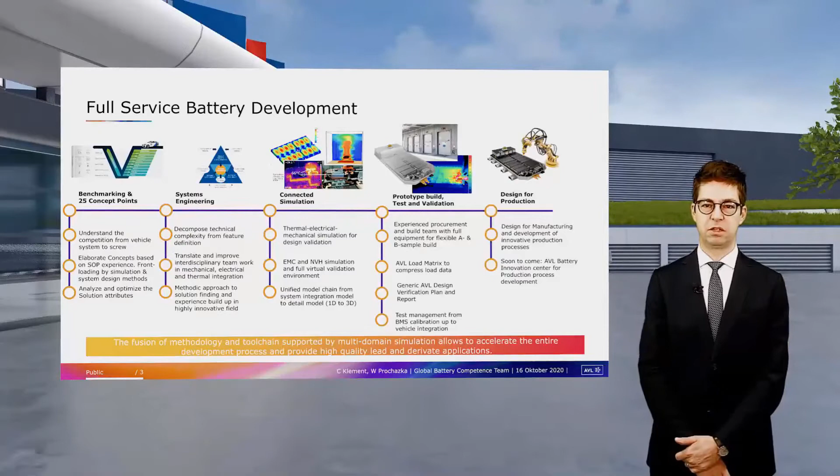So we have completely automated machinery, as you can see in the rendering still, but it's now in operation since April this year. Module stacking, laser welding, gluing, sealing, everything like that on fully automated 6-axis robot stations.

This means we're actually covering the battery development and the battery life cycle that you have as an OEM, from the inception of the technology that goes into the series development later on, over the development, the safety, the performance, the cost, the production, up to topics that are in field like serviceability and then recycling and design for recycling. And very clearly the CO2 life cycle is a topic for us too.

But today we want to look at the benchmarking, and we want to look at batteries that we have seen in the last iteration of this talk already, like the Porsche Taycan, NIO ES8 and then Tesla Model 3, with a new contender this time, a fourth contender — up to now I only had three, this time I actually have four — the BYD Han.

Very interesting pack because it is LFP, the others are NMC packs. It is a cell-to-pack approach. It is approximately the same size as the Tesla Model 3 pack in terms of usable energy capacity. But you can see it has a higher voltage than the NIO and the Tesla, with about 570 volt nominal, which is more closely aligned from the electrical design standpoint to the Porsche. That's why I left it in here for some electrical safety comparison. And very impressively, it has more than 80% pack-to-cell weight ratio — 83 point something. This is why we're today comparing this pack to the others.

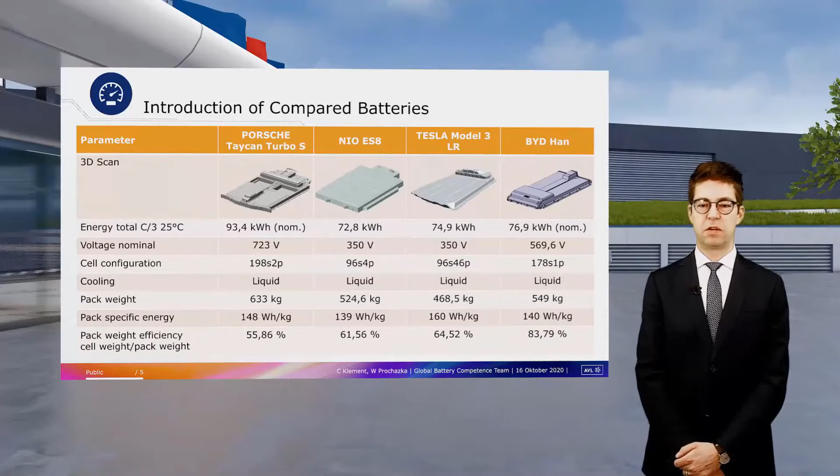Especially I want to take out of the benchmarking process — you can see there is a lot of work packages from the vehicle all the way down to the cell tear down — I want to take out the topic of safety. This safety is on one hand the integration safety, on the other hand it is also cell safety, electrical safety. We're going to compare the packs on a couple of those measures.

So first of all, I want to go on the vehicle side. Today with the recording I don't have the videos like in the last iterations, but I have pictures here, and it should give you the impression that on the Porsche Taycan and the NIO, the vehicle is stiff. The battery is stiff, but it's still more of a take-the-force-and-absorb-the-force on the side sill measure. The Tesla Model 3 actually is a very stiff vehicle.

So actually the side crash has the need for a side curtain for your heads and so on in airbags. It is a very stiff vehicle — it really bounces back from the pole. You can see that in the video here, not so much. The BYD Han is a very conventional vehicle in that regard. It is a quite soft vehicle.

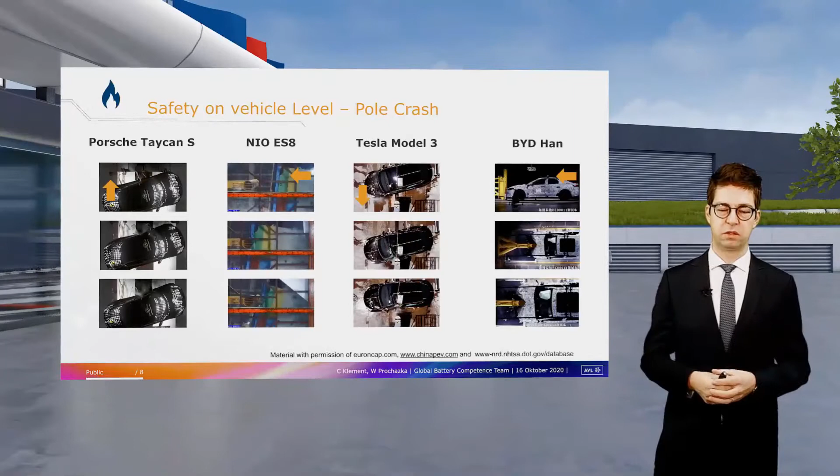It absorbs a lot of force, and it has a battery integration that is, by comparison of the screw lines, actually interesting. On the side, beside the screw integration, there's this red line, which is actually the cooling channels for the cooling pipe work for the rear e-motor, before it goes into the side sill area. So even if the battery is mounted, there is an exposed cooling pipe work here, and on the other side there's an exposed line as well.

So a little bit different integration. The other three vehicles, you can see the integration of the pipe work, if there is any - on the Tesla you can see it stick out - is on the top of the battery side. So there's a side sill, the battery, and the pipe work is on top, protected from the underfloor of the battery. A little bit different integration here than on the other three.

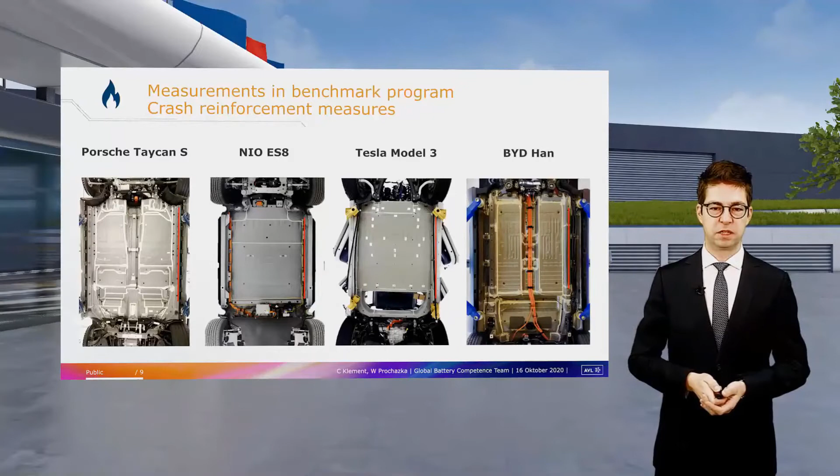In terms of distances to the side sill, the pure distance from side sill to battery pack is rather on the conservative side. NIO and Han are around 165, 170 millimeters, versus Taycan and Model 3 which are around 120 to 140. On the other hand, it seems like there is not so much on the side of the battery, as the side sill to cell distance is actually below 300. So here it's not the most conservative, it's somewhere in the middle.

But as with the two others that have a rather distanced side sill to cell distance, it is a prismatic cell, and it has the tabs on the sill side. So it doesn't have tabs on the top side like the Tesla Model 3 has. When you crush it, the high voltage bus bars are not in danger of getting short-circuited.

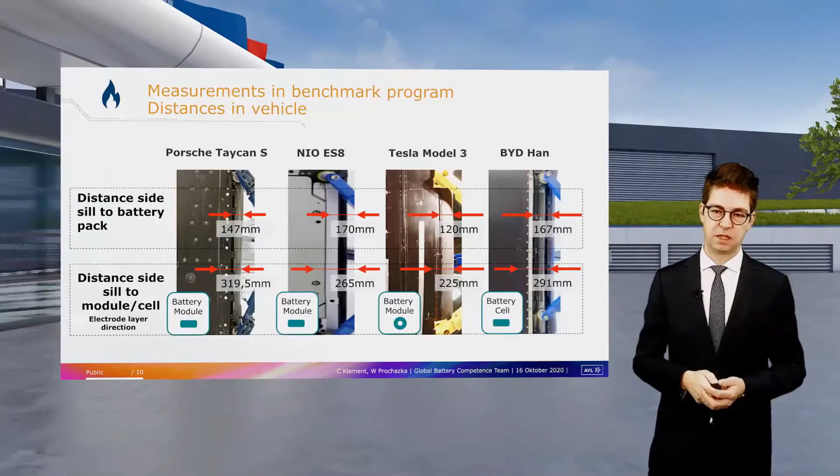So to look at the side integration in the battery pack, battery positioning - we can see the Han has a slight side sill here that is used for mounting. It's an extruded part, and then it goes directly into the tray. The tray is 16 millimeters, so medium size thick, and only on the rear side does it have this extrusion profile for the second floor. So this is only under the rear seats - the second floor you can see here. The front seats and under the main area, it's only one floor.

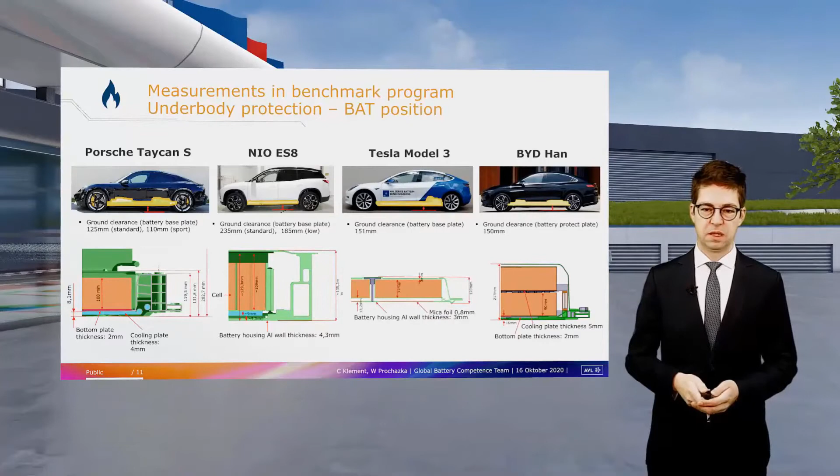And the cooling system is actually on top of the cells, not like with the other packs where the cooling system is between or underneath the cells. Here the cooling system is on top of the lower layer of cells. And the bottom protection plate is 2 to 3 millimeters, like in most vehicles. So here, quite state of the art.

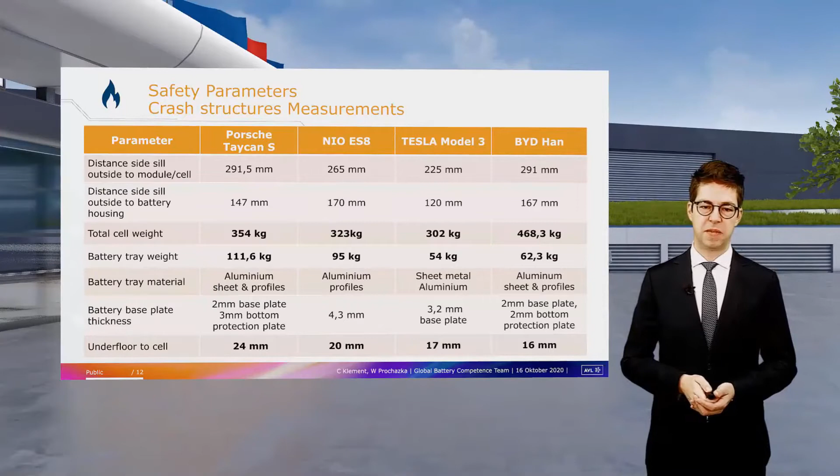What does that then give in terms of cell weight to battery or tray weight? That's quite interesting - actually it's the lowest number we have seen so far. So here, the cell-to-pack approach really comes into full play.

We see only 13% of the cell weight is actually in tray weight. That's even undercutting the Tesla with about 18%, even though it has the same base plate thickness, even a little bit more in terms of 4 millimeters compared to 3.2 millimeters, and it has the same underfloor to cell ratio as the Tesla Model 3.

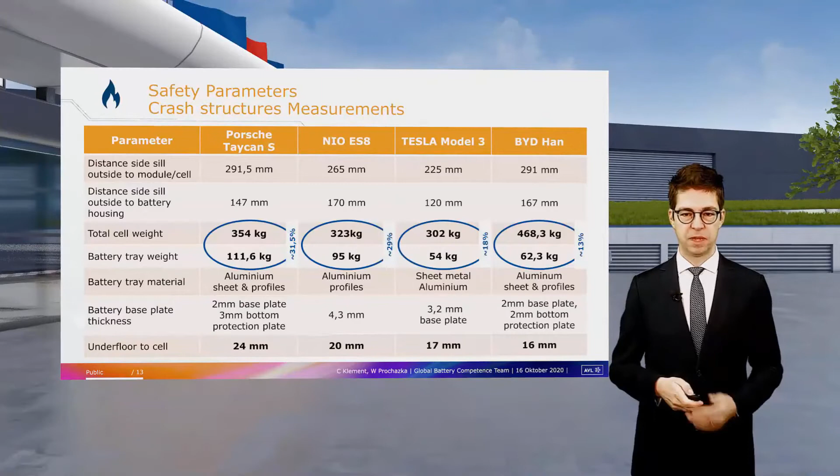So here, definitely the cell-to-pack approach plays out, and we can look at the cell to see if it can actually take all those forces that might go in its direction due to crash and so on. We put the cells into crush - you can see on the right side this very long cell. Actually, this is more than a meter of cell with more than a kilowatt-hour of content. So it was quite interesting to actually do all the abuse tests on it.

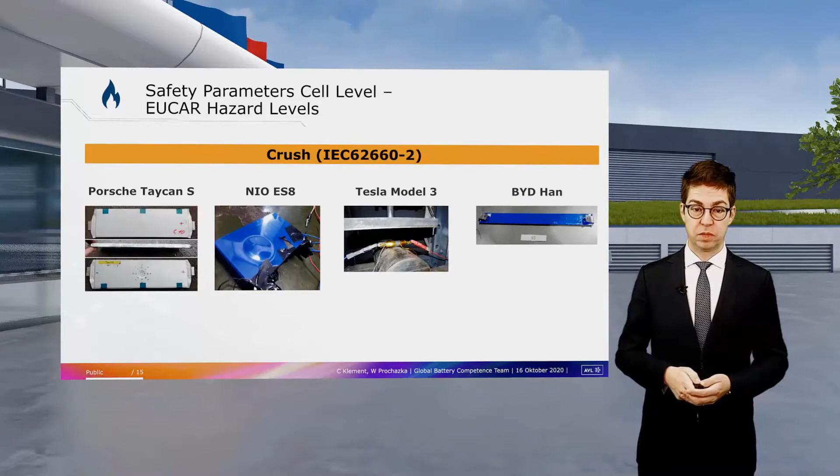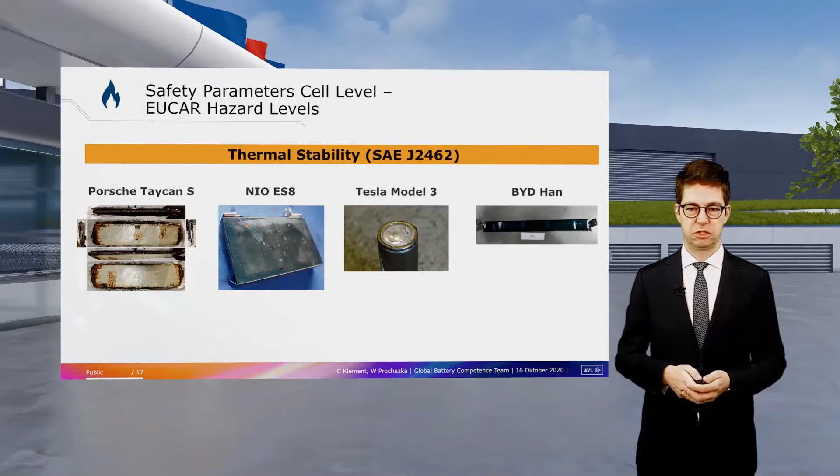But it survived quite well, so no issues on the crush, not really issues on nail penetration. For thermal stability, we had a reaction, so you can see the cell is quite dark, and also the cell is bubbled up - actually similar to the reaction the NIO ES8 showed in terms of strength. For electrical short circuit, all the cells survived quite well.

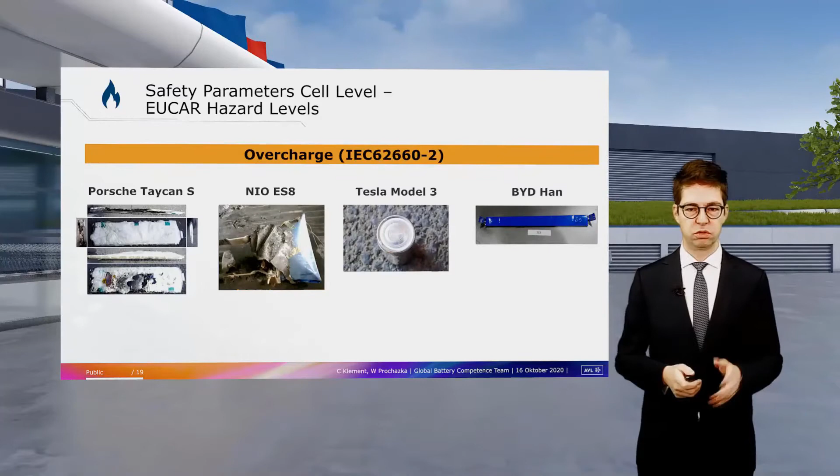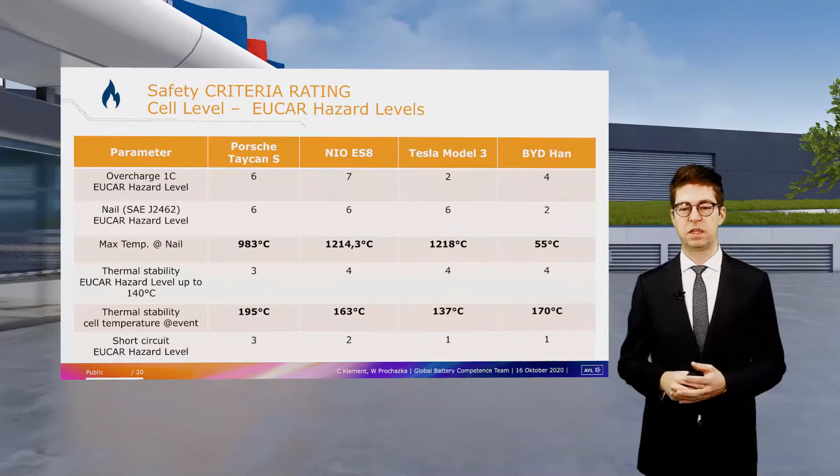Then the overcharge test, here also cells survived quite well, a little bit bubbled. So in total we can say that the Han cell actually has no safety level beyond 4 as of current testing,

which is better than the NMC cells, especially for nail and overcharge. On the other hand, for the nail penetration testing, the maximum temperature that LFP shows is definitely not even close to what the NMC cells are providing, even though the Han cell itself is quite large, and there is a significant amount of electrochemistry being shorted by the nail. So here we can see that the LFP cell is quite safe.

On the other hand, as I said, thermal stability, we're approaching nearly the same temperatures as with the NMC or NCA cells, a little bit less good than the Taycan cell. So the Taycan cell still remains the cell with the highest thermal stability.

Our conclusion here is that thermal stability is not so much a cathode material issue as it is an electrolyte and separator issue. We had some talks with a couple of suppliers since the last presentation I gave on this separator issue, and just seeing what kind of complex structures are in there, you can really say there is a lot of potential in the separator and electrolyte mixtures to get the thermal stability right. But it is also a cost issue that you have to offset somewhere on your pack level in the end.

For short circuit, we do have a hazard level of 1, so nothing really happens. In this case, the protection is quite okay. Tesla Model 3 has the same very low reaction, but it actually has an in-cell measure to compensate for that. So in total, we can say the Han cell is a quite relaxed cell for integration,

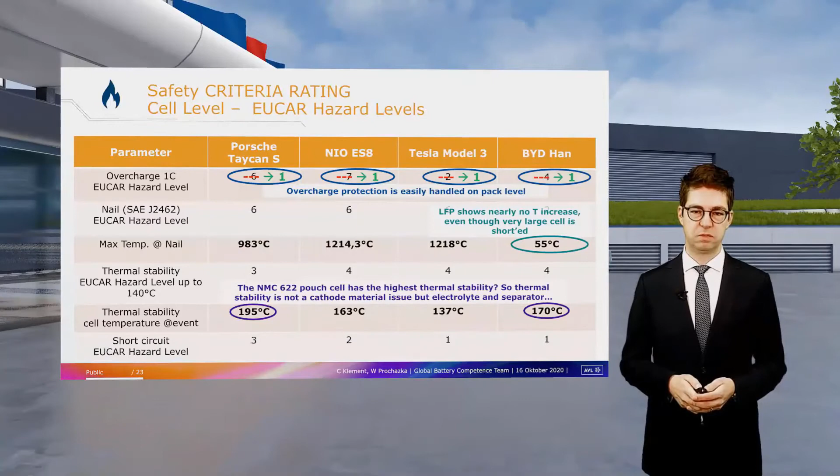and it gives a good indication that LFP, when coming to the markets or being released in the next years, is a chemistry that you can implement into a battery pack while lowering the safety measures a little bit from the NMC world, making it a very good candidate for the topic of cell to pack.

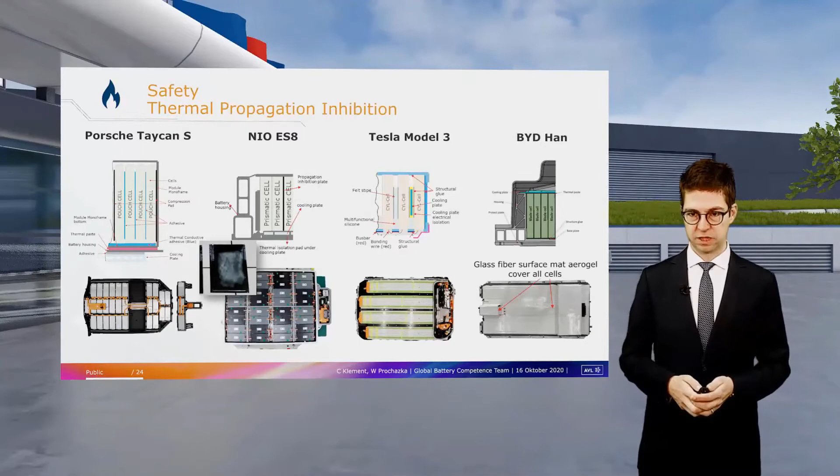In case there should still be some kind of issue, what are the thermal propagation inhibition measures this cell to pack has implemented? Here we see a glass fiber mat with an aerogel that covers all the cells, including the thermal system, so it's above the thermal system. There is a mat over the whole battery inside the cover that protects against any hot spots or hot gases that might come out of the cells, protecting the passenger compartment.

We also have a venting strategy here: venting and two breathing devices, combined devices, in the rear of the pack, towards the chassis structure. As expected, the pressure of the gases released will be quite low, and the temperatures will probably be quite low too. This is opposed to other packs where we've seen venting towards the chassis be more of a problem in the NMC world. Here we don't expect this to be a problem, and we see it as a well-protected spot to place those breathing and venting devices.

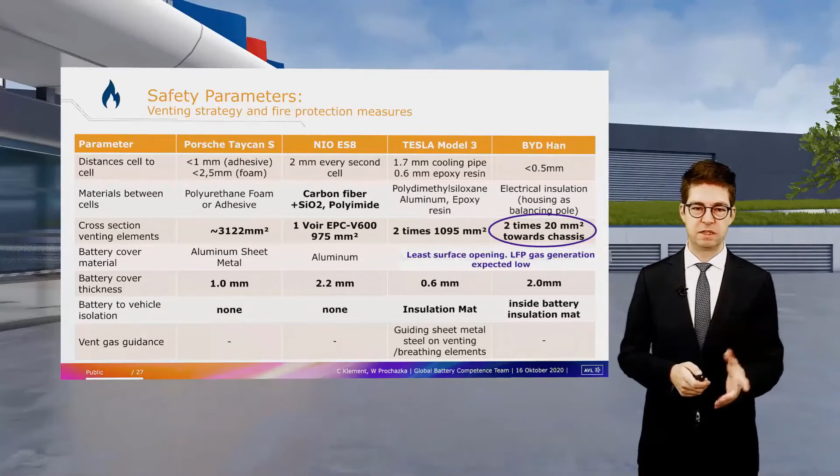So what can we say in total about venting strategy and fire protection measures? There is a very close distance cell to cell on the Han, lower than 0.5 millimeters. There's just some electrical insulation between the poles, between the cells, and there is a very small venting surface. But as the gas generation is expected to be low, this is not a problem.

On the other hand, the very small distance between cells is also a little bit attributed to the LFP having less swelling and breathing than an NMC would have probably in the same size and format, and also its high safety rating really plays into the topic of cell to pack quite nicely.

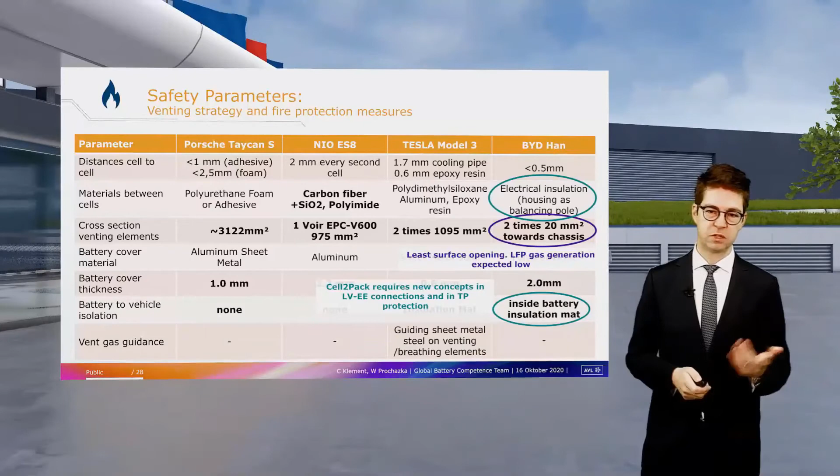One thing to point out, if you ever thought about balancing on such a cell pack where you have the poles on the opposite side of the cells, you would have to have connection wires or some kind of FPC across the whole pack to connect the two poles for balancing. An interesting solution that BYD has chosen here is to make the housing itself the transmission pathway. There is a separate pole on the housing that connects from the outside to the housing in order to have balancing hardware only on one side, using the housing as the transmission pathway for balancing. That is also why strict electrical insulation is needed on each housing towards the chassis mass and towards the next cell, which is the 0.5 millimeters.

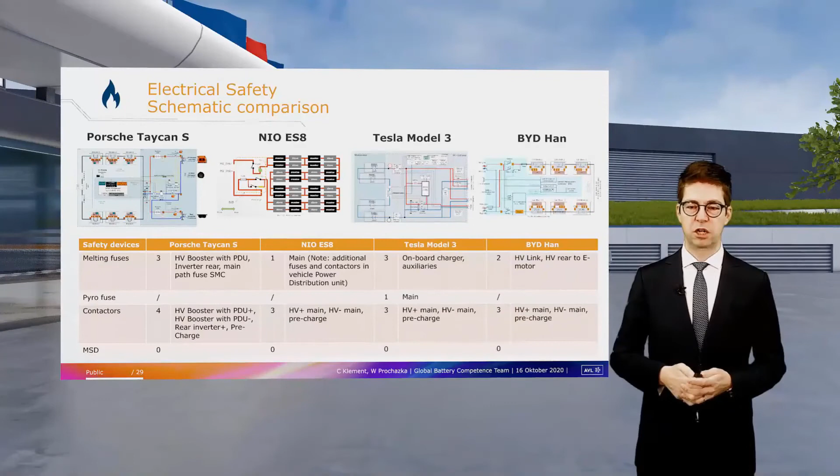Talking about electrical safety, we have a schematic comparison here. On the electric side, there are 2 melting fuses inside the Han pack, which is quite standard, and there are 3 contactors: HV plus, HV minus, and pre-charge. We have seen on the integration and pack slides that there are bus bars inside the pack to connect the front of the pack with the rear, and there are also high voltage cables in the car integration in the middle tunnel connecting the front end of the car to the rear. So there's probably some space for optimization here, for efficiency measures on the car and battery pack, in order to not transmit current back and forth over very long distances. There could be different architecture choices, but we see some optimization potential here.

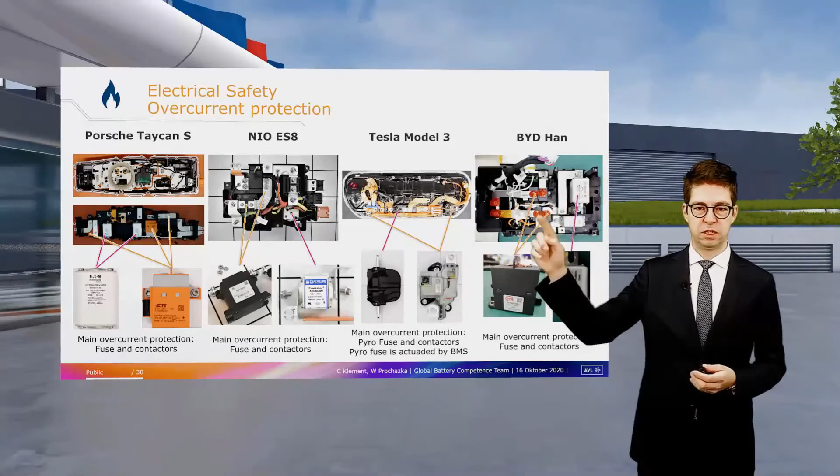On overcurrent protection, we have the fuses, and you can see them integrated into the electric box right here. There is another one that is mid-pack, and there are 2 of the relays here and 1 in the rear section.

On touch protection of the whole pack, we see IPxxB on the Han, so quite standard, no surprises here. And on the picture of the pack, you can see those large bus bars that are actually connecting the second floor to the front EE unit and the rear EE unit.

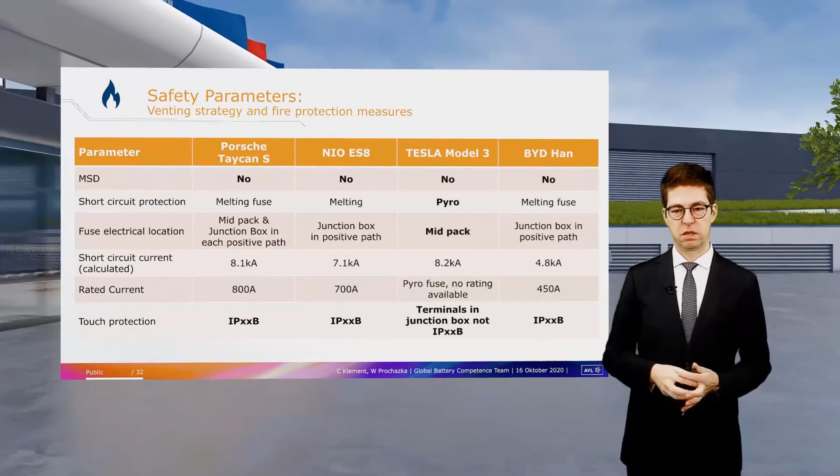So in total, for the safety parameters, I would say quite standard, no MSD. There is a melting fuse in there; the fuse location is in the junction box in the positive pathway. The short circuit current calculated here is actually 4.8 kiloamps, which is quite a lot lower than on the other packs. We believe this is due to the higher voltage of the pack, there is less electrochemistry connected in parallel, and more connected in series to reach the 570 volts, so the power is reduced. You can see 450 amps nominal versus the 700 to 800 amps that you need on a 350 volt pack or on a high power pack like the Porsche Taycan. So overall, the fuse is significantly smaller in terms of weight, but the volume and length are still significant due to the voltage.

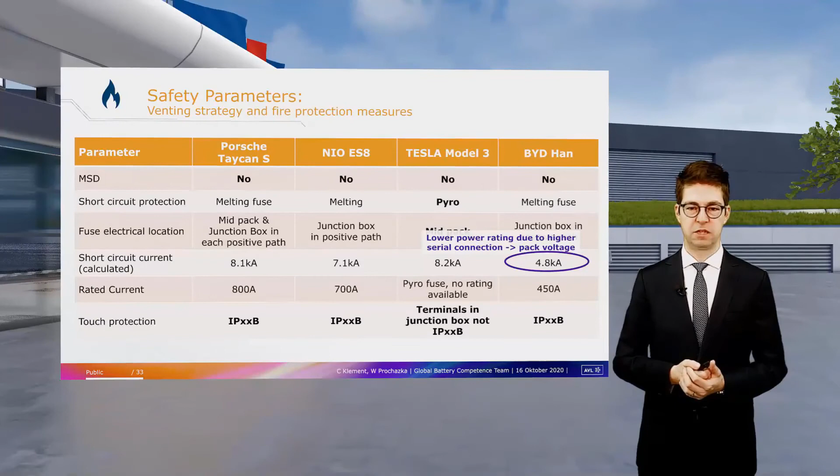With that, I want to conclude my presentation today on the safety and integration features of the BYD Han, a quite interesting vehicle. I believe we will see much more of the cell-to-pack integration and new cell formats like this in the future, as there are definite advantages and also some new risk balancing structures. So in total, I think there is quite a lot to be learned from such benchmarking.